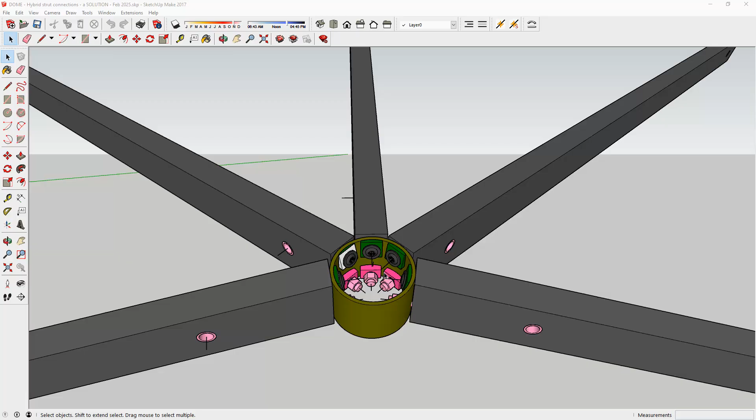In front of us is an exploration of the hub design that I want to have another look at. It's one I'd contemplated using before, where while we use the lower assembly with the threaded rods etc., I had almost rejected using the heavy commercial type screw in the top level of the strut to hub interface. But I'm looking at it again. The complication comes from wanting a surface upon which the head of the washer, which is 25 millimeters in diameter, can bed up against flush, so the stress doesn't compromise the head of the screw, potentially creating a stress point and maybe at some point a fracture.

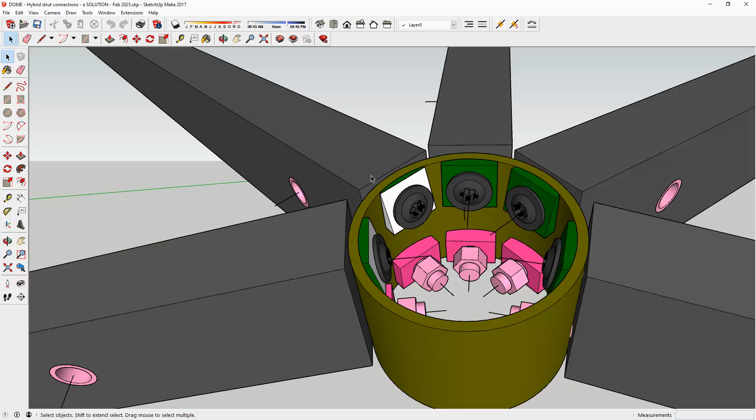So in my journey, which has been many, I have created the model of a Spax screw, very accurately I must say, for this part. I found the geometry for it and created the angle, inserting them at an angle parallel to the top of the strut.

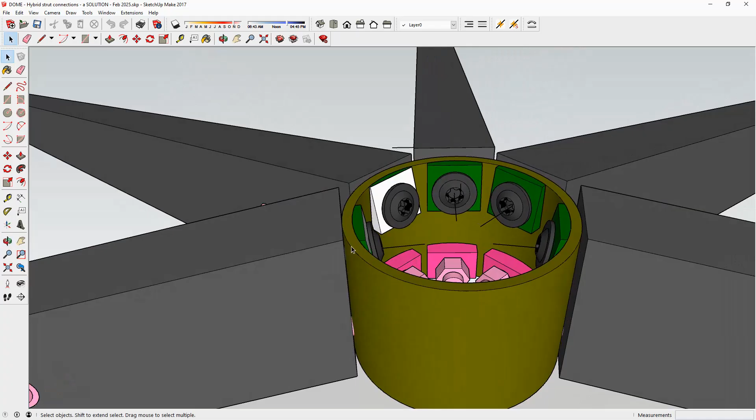And then I thought, I really can't see the goings on inside the strut. How do I do that? Normally I'll just make the surface semi-transparent, and I've done that successfully in the past, and it's been quite good. Anyway, I was watching Aaron,

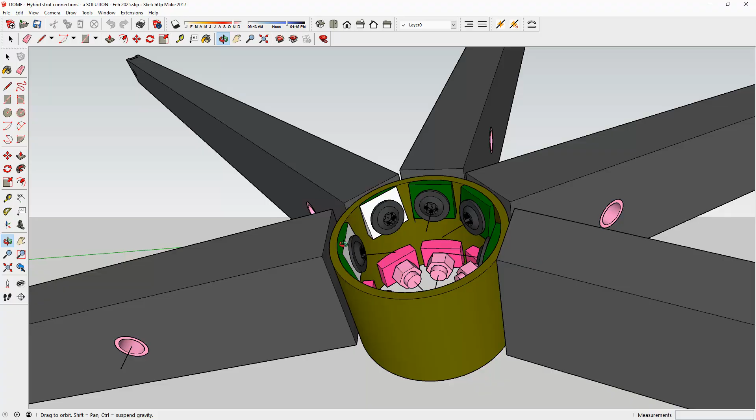who does a lot of his YouTube stuff on SketchUp, and he was making a comment about some common problems people have - they'll see this in their drawings and wonder how the heck they got there and how to get rid of it. It shows some of the internal, hidden geometry, as it were. It's not quite that, but close enough.

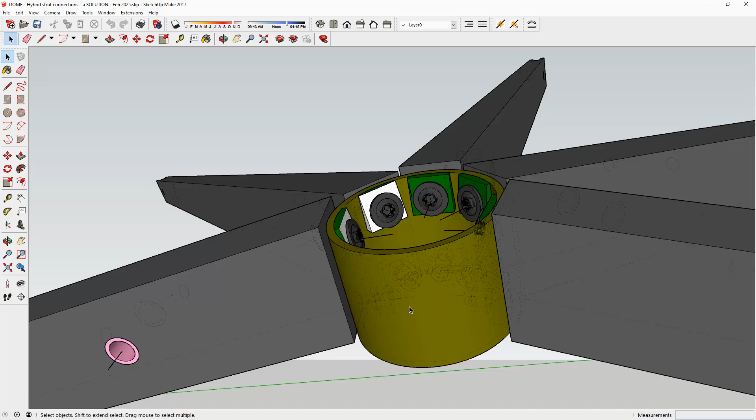But the components within SketchUp, as if the surfaces were semi-transparent - he said you have to use, in this case, the K button to switch that on and off. Some people don't know that, so his solution was to switch it off using the K button. Then he made reference to the X-ray - he said it's kind of like the X-ray facility within SketchUp.

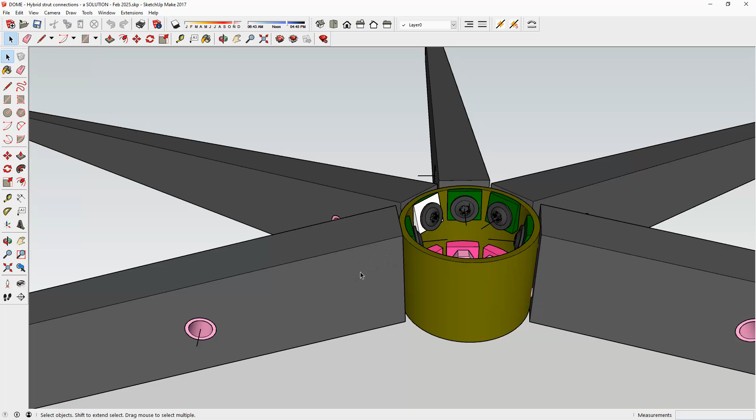And I, for a long time, had wondered why on earth anyone could make use of the X-ray type facility within SketchUp. And then it clicked - it makes the items transparent, pretty much, and allows you to see inside your structures. And I thought, wow, that's it.

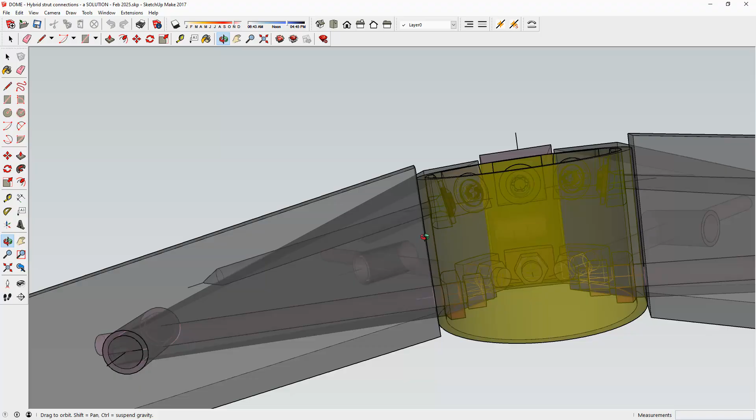This is exactly what I'm going to use for viewing how, say in this case, the screw is laying inside the structure. Does it interfere with the lower assembly, the threaded rod, etc.? And I thought, well, that's a good addition to my skill set using SketchUp. Hadn't looked at it for many years and put it aside.

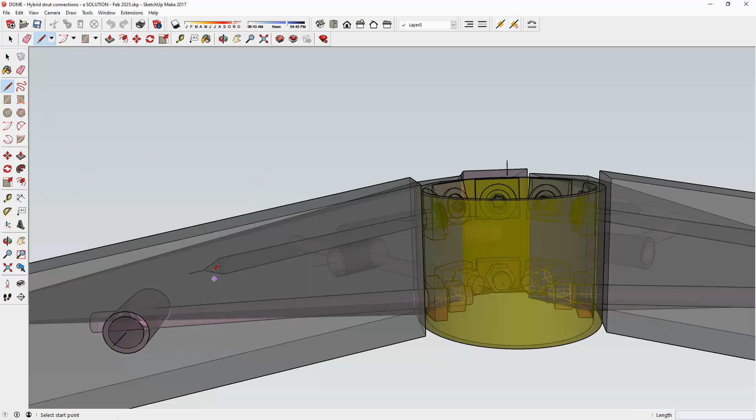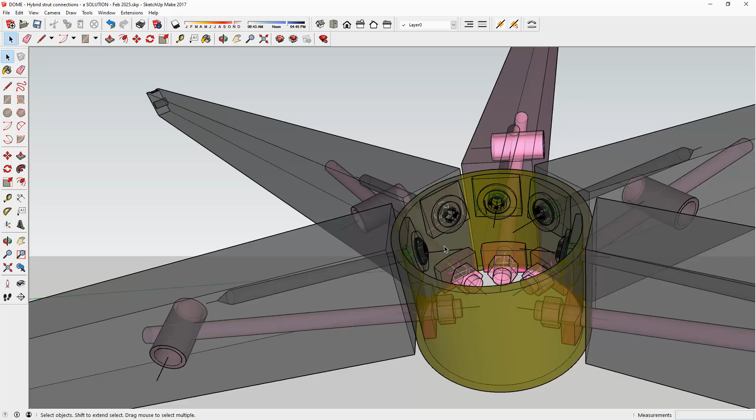Then I had a thought - hang on a minute, I'm going to click the line tool. I can actually select points within inside the strut, and I thought, oh, that's amazing. If I wanted to, I could go in - I can select, whoops, I'll back that out because that didn't work. I can select the screw, click into the group, and if I wanted to delete it, I can come into parts of it and select it. And I thought, wow, that's amazing. Isn't that handy? It means for locating, etc.

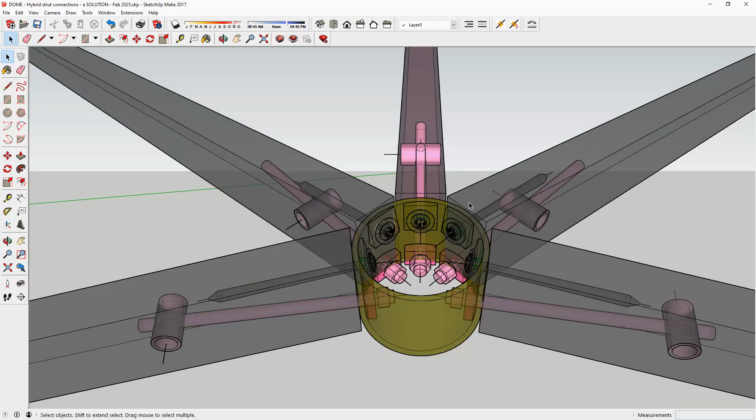I know I'm banging on about all different ideas until I came to the strut. And I thought, this is exactly what I need to be able to do when I want to manipulate the drawing a little bit. Quite often, let's just come up here now as an example I can show you.

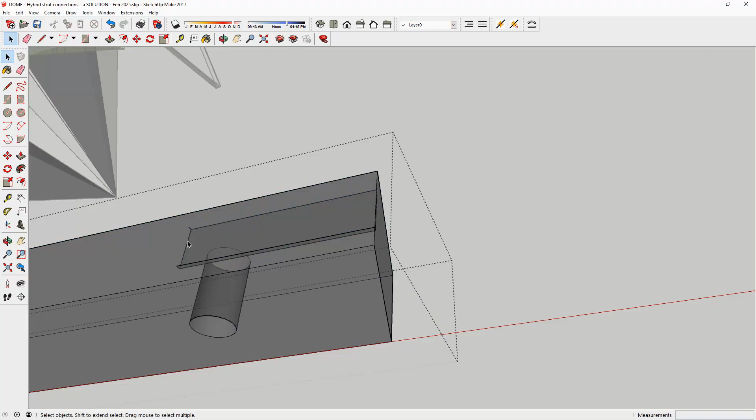If I did this to re-establish the surface, and got rid of the recess that was in the strut, now I can't really see inside the strut anymore to carry on deleting things, unless I use X-ray.

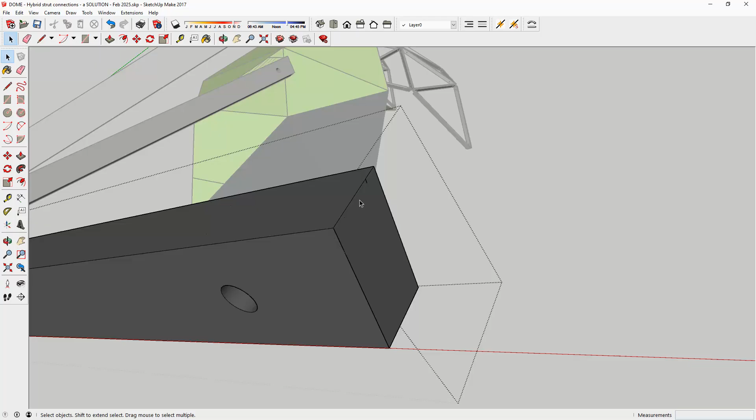Oh, I can see this here. Well, okay, I'll delete that. I can delete that. Oh, fantastic. What's that little dot there?

Okay, what happens if I hit... it's still some of the internal lines left from when I had that recess, and that little dot I saw was this line. Click into it.

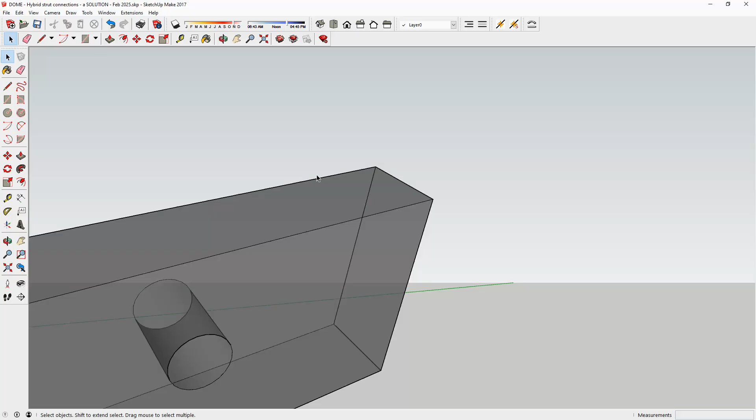When I go into the surface, I can select for deletion my lines that I normally would never be able to see, and you can only do that within the X-ray feature. Oops, sorry about the zooming in and out there of SketchUp.

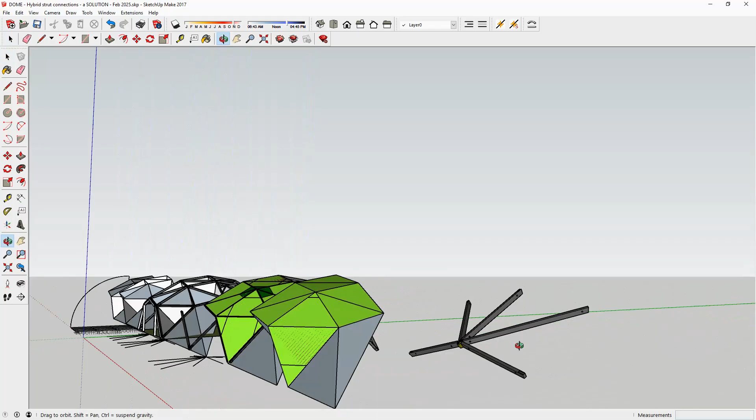I thought, wow, that has now become my new favorite toy or feature. It allows you to better control, manipulate, alter your drawings without having to turn the darn things translucent, and that can sometimes be a problem. If I turn this one translucent, it turns all of them translucent to the same degree.

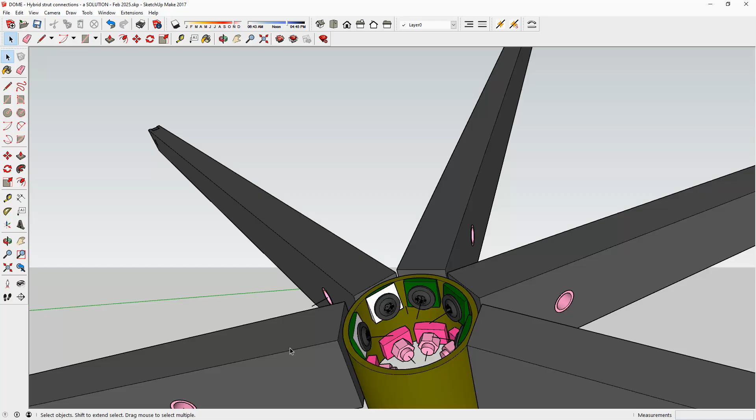I think you can make this unique, but I've had problems being able to do that.

Sure, I've done that before, because if I choose this specific grey - and Aaron or someone like him will be saying, of course David, you just do this - but if I select that particular grey, now what one is it? Which one is it? M06, not that one, but that one.

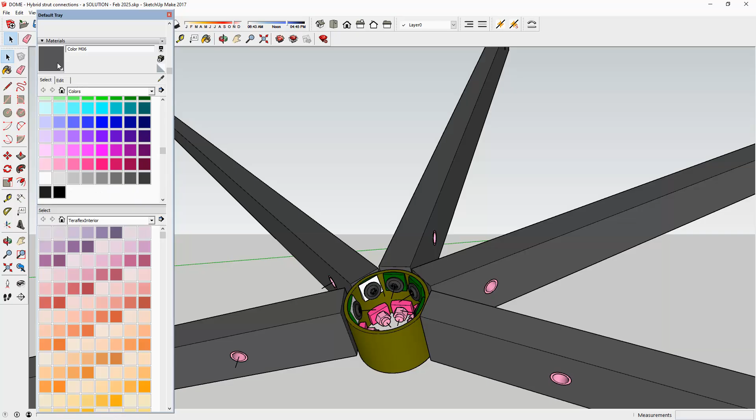If I come up here and turn it transparent, it turns them all transparent, which is not always what I want. I just want to make this unique and only have this one, but all the ones with a similar colour, including other ones over here, have now all gone transparent.

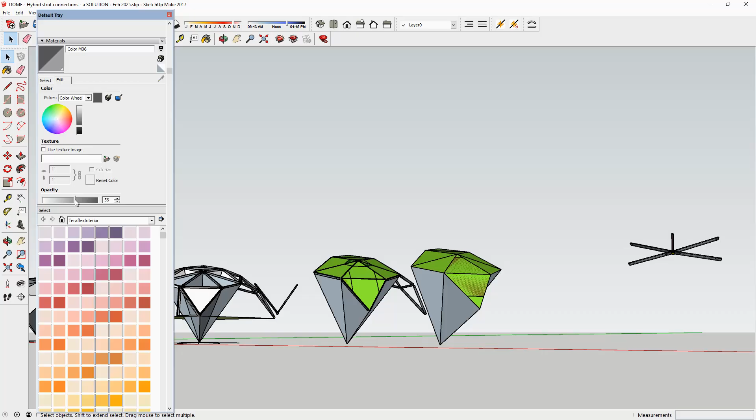That's a pain in the neck sometimes. So I want that, I don't want it transparent, and I don't want it to be universal. So now I'll just undo that.

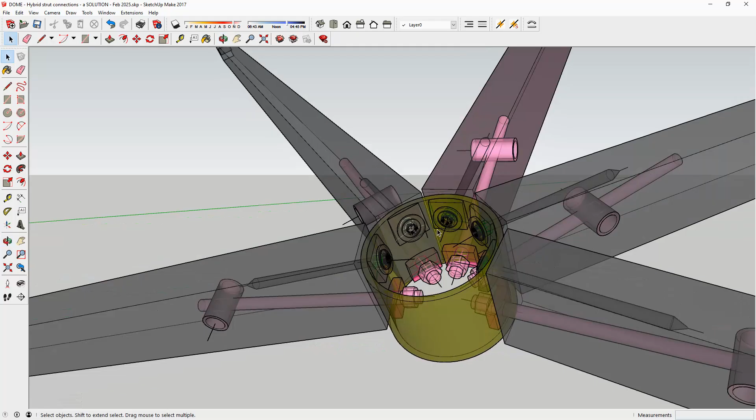I can achieve a very similar outcome by hitting X. Well, yeah, okay, it's all transparent, but I can click it on and off at the simple tap of a key. So that was a really good step forward for me, a nice feature of SketchUp. So another thumbs up for SketchUp.

God, I should be being paid for this. They don't know I exist. I've got no contact with SketchUp, so don't worry, no conflict of interest, but yay for SketchUp.

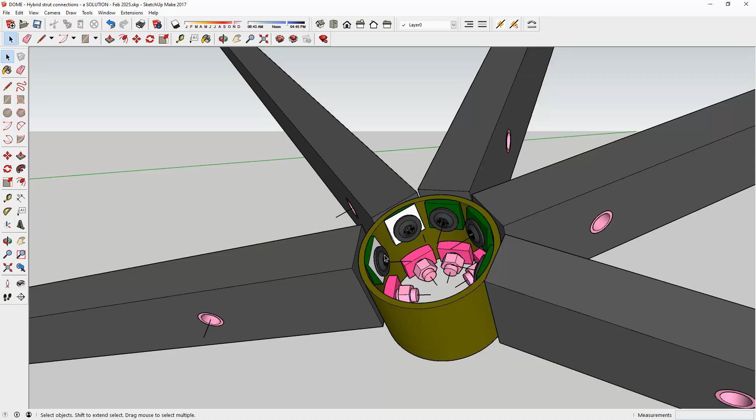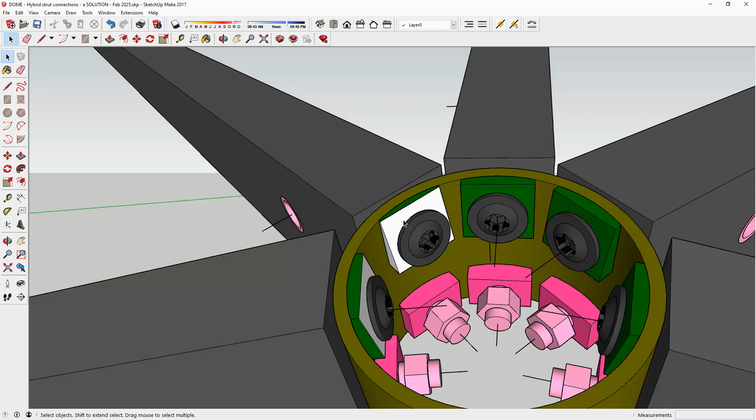Okay, that's it, I'll be making another video. I was actually going to touch on making this model here, the Spax screw, but I may leave that for another time. I also need to look at how we create this particular washer interface, where it's got a curved surface to mate up against the hub and an angled surface to allow the head to mate up in a flush and flat manner. So I'll look at that.

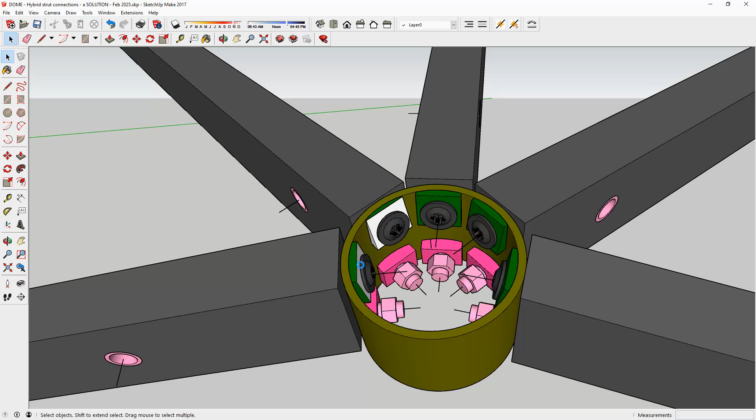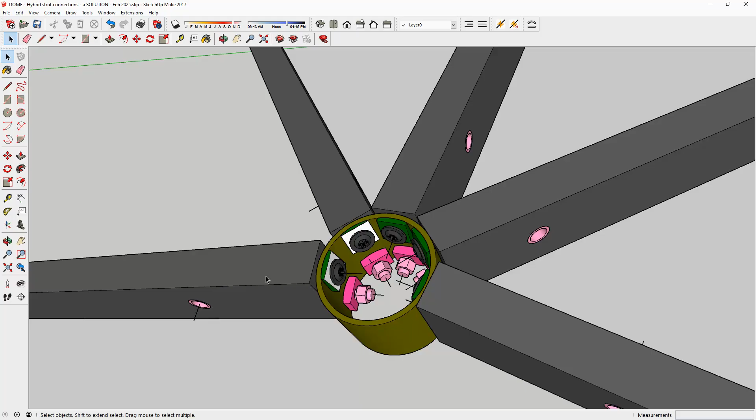But there is one more thing I want to look at before I move on - it's another mea culpa. I have been bad-mouthing SketchUp at times about how well they do a drawing, but how bad they do the measurement side of things. Well, guess what? I was wrong. And worse, I know that very fact, as I'd used it before in the past successfully, and then had proceeded to forget about it, and then criticise unfairly my much favoured and enjoyed SketchUp. So I'll get onto that, outline the pros and cons and why I've wound up where I've wound up, and why it's natural for the criticism to come about, albeit it was unjust.